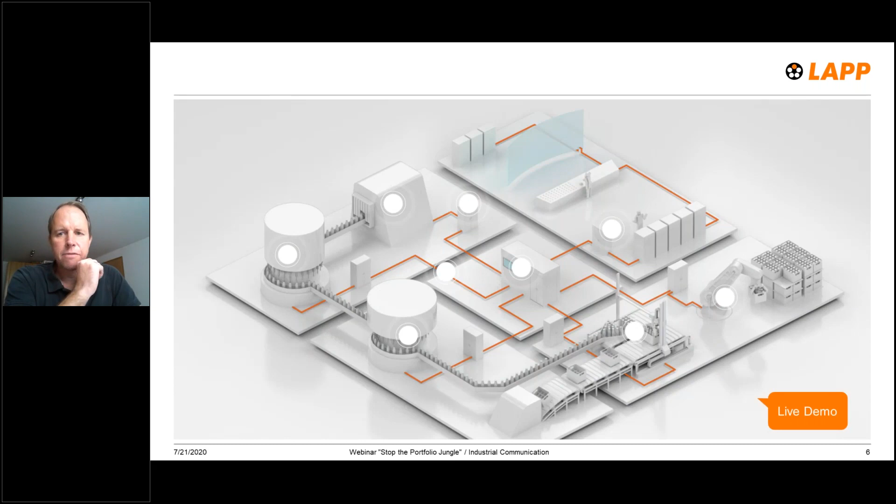So now let's go inside and let's have a look at our website, where you can find all these great tools for helping you in finding the right products for your applications.

So now we are on the LAPP website, lappkabel.com. This is the English version. You can switch over from German to English if you don't know how that works - it's on the right side here.

What you can see on the left side here is the normal entrance if you are looking for a certain component. If you're looking for a certain Ölflex cable, or Unitronic bus cable, or Etherline data communication cable, there you find the hierarchy behind this, beginning from Cat5 to flexible installation and so on. And then at the end, you'll also be guided to a certain part number of your product.

But what I want to show you today is some alternative and new ways that we have created to find that right product, especially now today focused on industrial communication. I will switch off the camera now because I think it's easier for you to see the complete website that way.

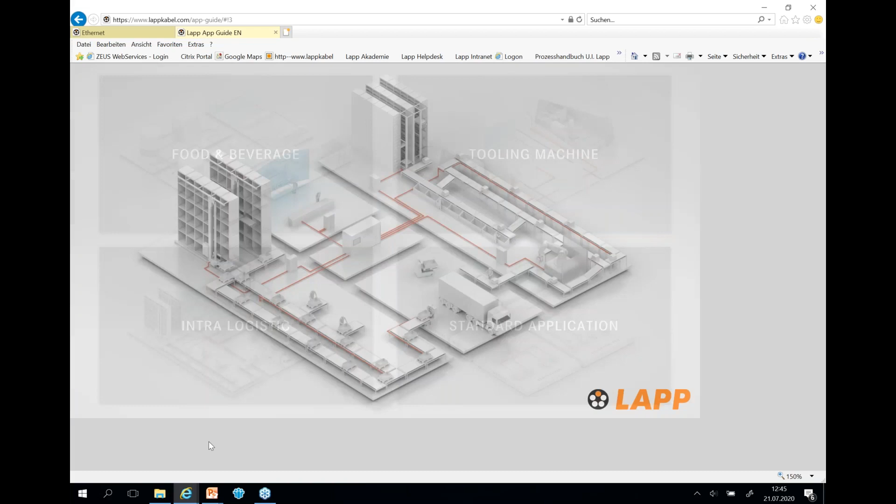But sure, since we are offering a lot of solutions for different industries, at the moment we have 3 industries here. Since we are still working on that tool, it's something that will be further developed, and some further industries will be added there.

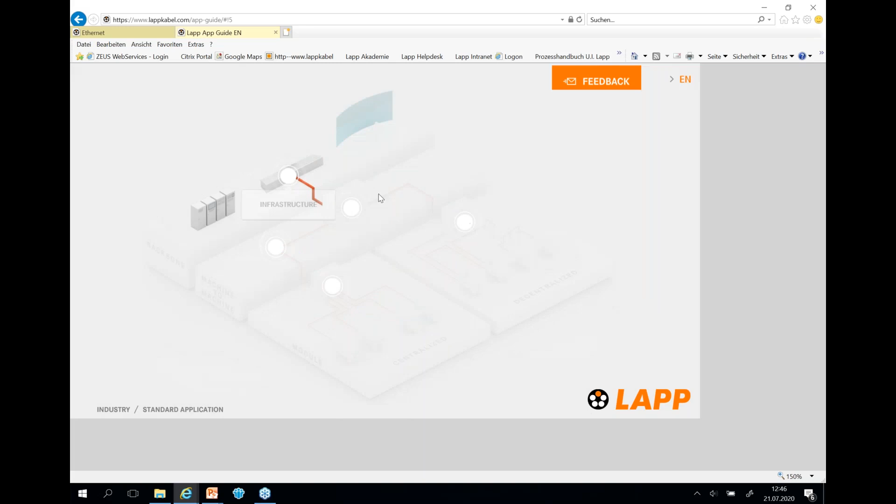So if you are working in a different industry that is not mentioned here, you can also refer to that standard, what we call standard application. If you look at this, it looks a little bit like the automation pyramid, where you have the office environment, the machine-to-machine communication, and certain machines where you have to build up some communication.

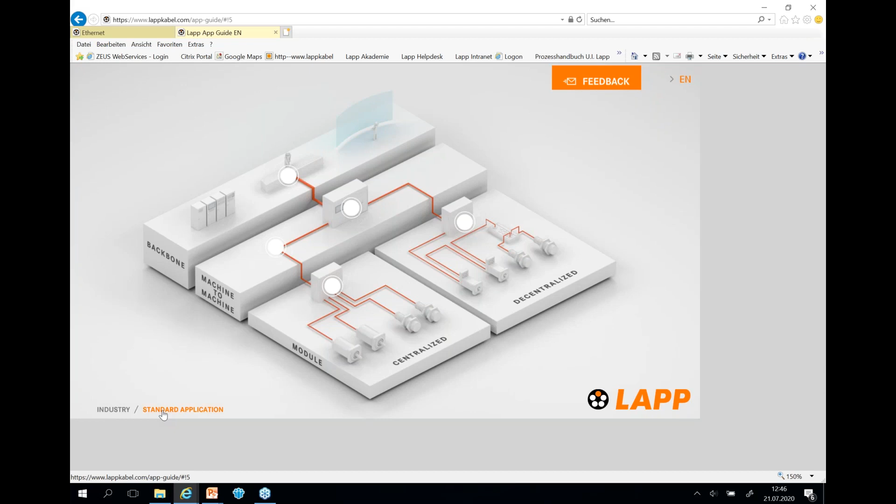So I want to show you some examples in the food and beverage industry. Food and beverage is a very demanding industry, especially for environmental conditions, because you have a lot of food there, you have a lot of cleaning of machines with aggressive cleaning detergents, so for components this is very often high stress, and you need very robust, reliable components that can withstand those conditions.

So first of all, we have to select here the communication system. Now you can find exactly one here. This is Profinet, in Europe the most important system, but we are planning also for the future to enhance this with additional communication systems like Ethernet IP. So we select Profinet.

Now we see this plant here, which is a bottle filling plant. That means we have here a bottle cleaning machine, then a bottle filling machine. Next step is bottle closing machine, and then boxing machine where the bottles are packed in boxes, and then we have a palletizing robot at the end, which takes the boxes and puts them on pallets.

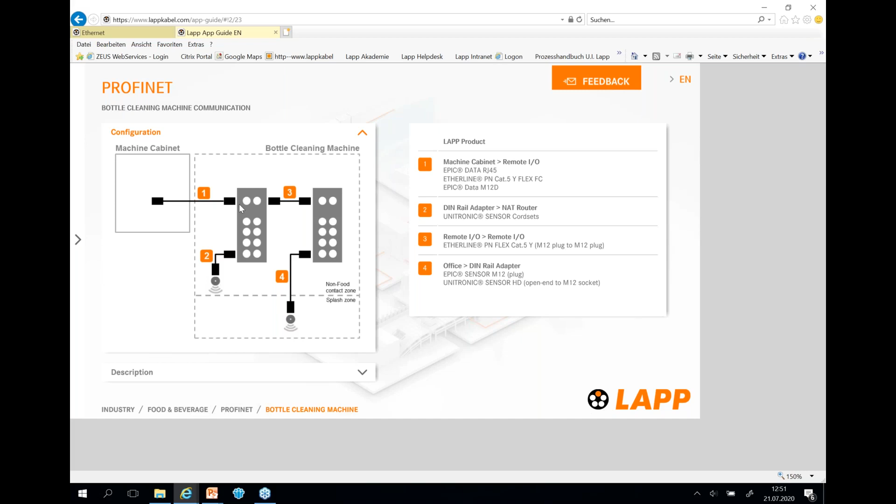So now looking at that cable, EtherLine PN-Cat5 Y-Flex FC is a Profinet cable, category 5, PVC, flexible, and FC stands for Fast Connect. That means it can be stripped with our Fast Connect stripping tool. Inside the cable there is a special inner sheath under the screen. So with this we can use that tool that makes stripping very fast and easy, stripping the outer sheath and the screening of the cable in one step.

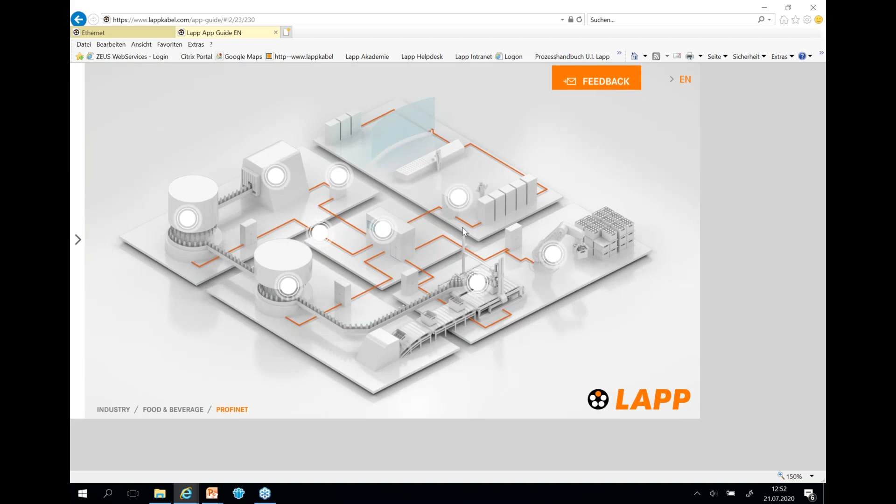So, sorry, I did not use the back button. So now looking at other application, let's have a look at that palletizing robot here.

Robots are not just used in food and beverage production, they are also used in automotive production or in other applications. So the solutions you can see here could also fit similar applications where robots are used.

What is very typical for cabling on the robot is the cable that goes from the foot to the remote I/O, which is placed on the gripper of the robot. On the remote I/O, there's also a sensor connected with a sensor cable. So again, it's an end-to-end solution coming from the machine cabinet, going to the remote I/O, and going to the sensor. What I said was very typical here is that cable for a robot, which is a special torsion cable, because on the robot we have a lot of torsional movement and stress for the cable.

So what we recommend here is our EtherLine torsion Cat7 cable, which is a category 7 cable, very robust for torsion applications. Depending on the device you're using, the remote I/O, or there could be also a camera or something else, you could use a category 5 cable, which could also fit for 100 megabit remote I/O. We have selected here the torsion Cat7.

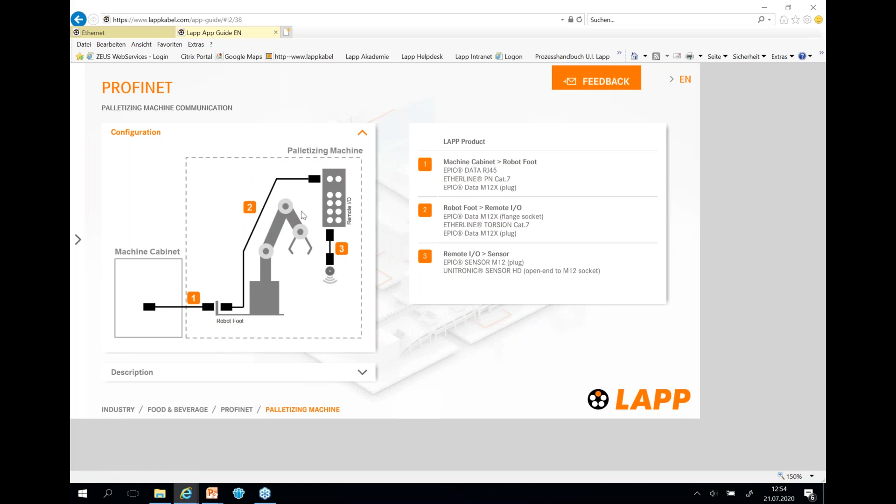So, and since we are using an open end patch cord, we also need a connector that is connected on the end of the cable and goes into the remote I/O here.

What is also designed in here is an interconnection on the robot foot, which makes it possible to easily and fast change that torsion cable, because this torsion cable is stressed by the torsion movement, and so there's also some wear and tear at the cable. Sometimes this cable has to be replaced, and that makes sense to have a connection here.

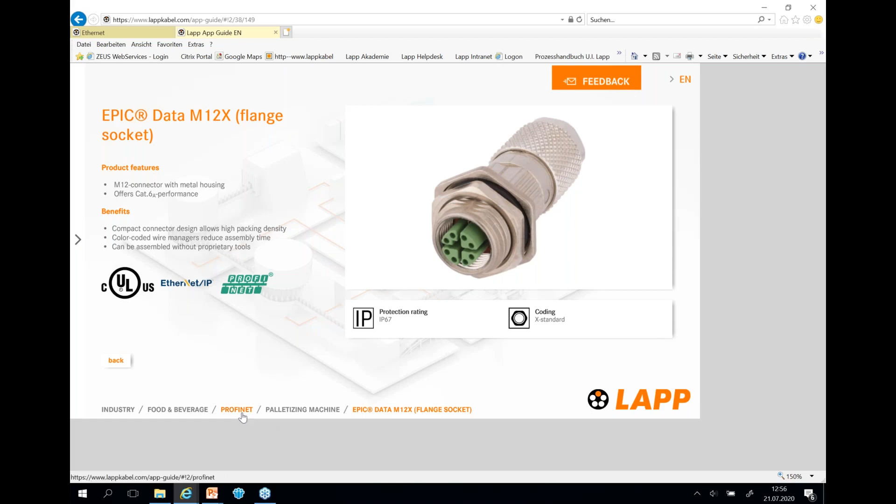So, last but not least, number one, that goes from the robot foot to the machine cabinet, and installation is usually in a cable raceway or on a cable tray. We have decided here to use EtherLine PN Cat7, since here the installation is in a raceway, but sometimes it could also happen that you have a cable tray. In this case, we would recommend using a tray cable.

And going in the cabinet, we have our Epic Data RJ45 connector that is connected to the end of the cable. That's a field installable type where you don't need any special tools to install it. It can be installed very easily and fast.

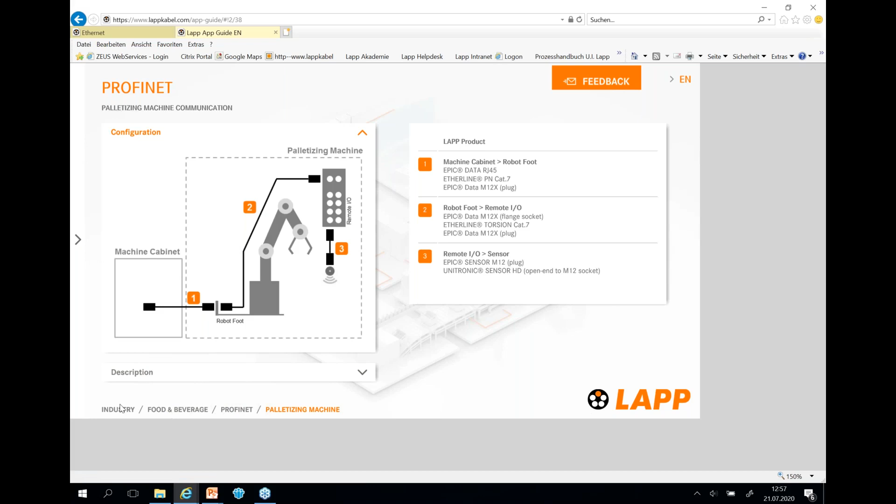So now let's jump back. Just want to jump in here. You know, many machines or plants also have a main cabinet or control cabinet where you can control the whole factory. This is what we also have here. And this control cabinet or main control cabinet makes the connection between the factory, the plant, and the office. So we always have the machine cabinet of the machine connected to the main cabinet, and we also have the office that is connected to that main cabinet.

So what you can see here now, some typical components you can find there: a PLC, maybe an HMI for controlling the process, and then we also have a remote I/O connected here. The patch cords we are using here are our EtherLine PN Flex patch cords, which are Profinet patch cords for these two RJ45 connectors, perfect to do the connection between components like that switch and the remote I/O, or the switch and the NAT router there.

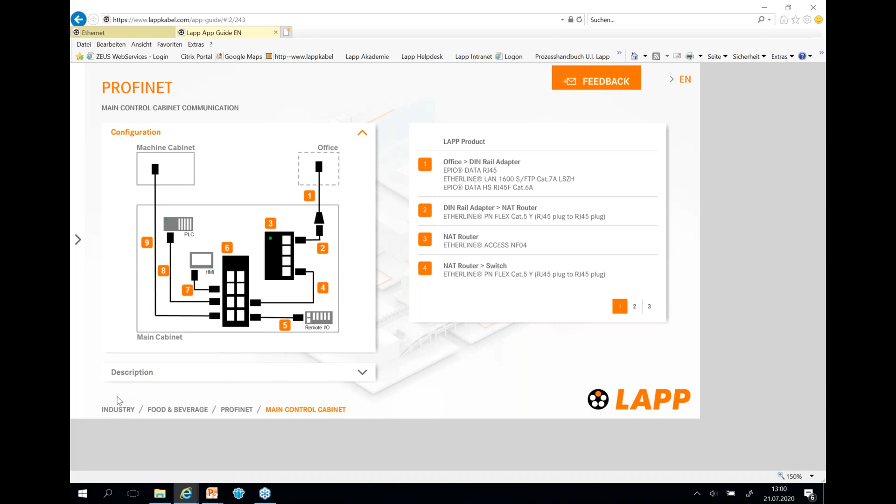Okay, that so far is about our application guide.

Since very often you are maybe supplying different industries, maybe not food and beverage, maybe not automotive production, we have another way created here: product selection by protocol standard.

Sorry, that was the wrong one. I don't want to jump in here. I need this one.

So Ethernet applications can be found here on the left side. There you find many standard applications that you can find in typical industrial machinery.

You often have a main control cabinet, a machine control cabinet, and communication from cabinet to cabinet. That means a typical cable installed on a cable tray for communication between two cabinets, or some call it machine to machine.

Then we have robots, or linear moving applications. This is usually done with drag chain cables. Or we have building, office, or daisy chain topology. If you have a transport line for material transport, you often have a so-called daisy chain topology.

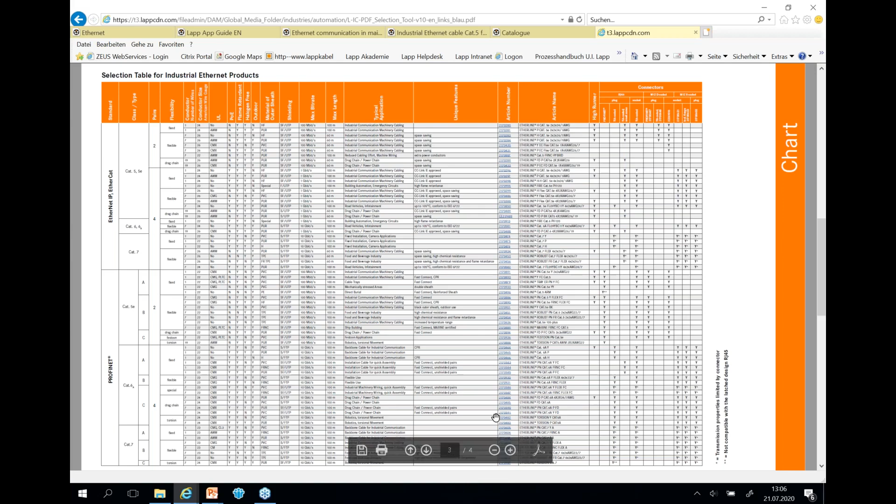Installation class A means it is for fixed installation. Let me make this a little bit bigger so you can see it.

So, you know, Profinet is separated or classified into different installation types. You have A, B, and C.

A stands for fixed installation, B stands for flexible installation, and C stands for moved applications, which means it could be a drag chain, it could be a festoon installation, which is such a cable wagon, and it could also be a torsion application, for example, in a robot.

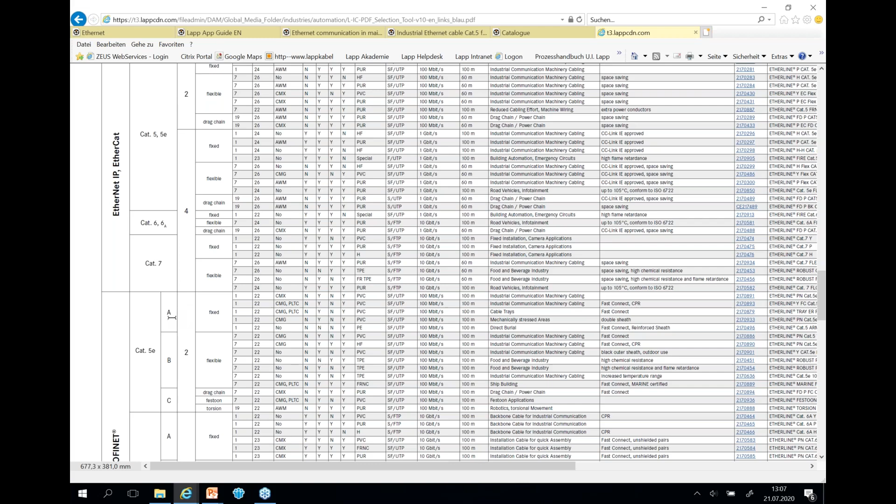So now let's go with that example. We are looking for a Profinet cable with fixed installation, and now we also need a UL approval, which could be CMX, CMG, or PLTC.

And what is the difference? CMX means limited use — you can use it only inside the machinery. CMG and PLTC means it can also be used outside the machine; G stands for general.

It could be used also for connecting two machines. And PLTC is power limited tray cable — tray stands for the cable tray. That means it can be used also on a cable tray, also for connecting two machines together. So now let's go with that simple CMX cable here.

And then we can look at some further features here. Suitable for PoE, it is flame retardant, halogen free, or could be used for outdoor. And then we can see here, can it be used? Is it halogen free? In this case, not. It's simple - where's the material here? It's a PVC cable, and PVC is not halogen free. So it is not halogen free, it is a PVC cable.

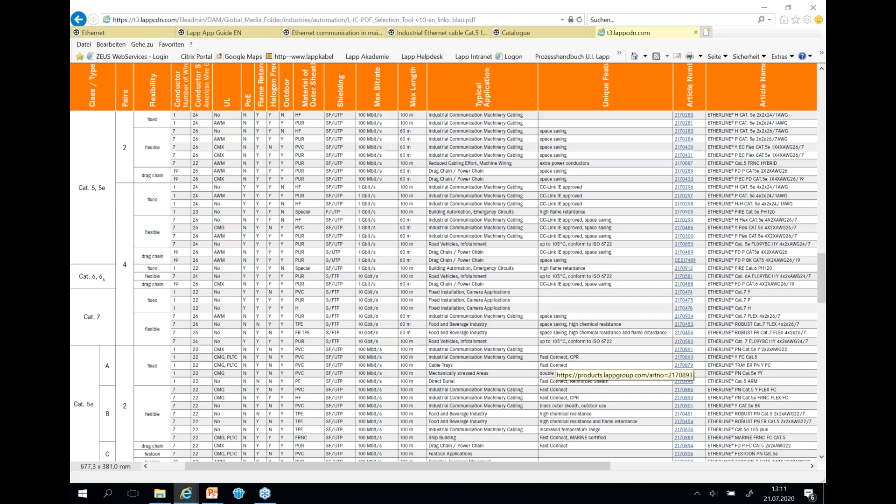So that's it. And once we have selected the cable, then we are maybe wondering which connector we can use for this. So there you can find a selection of connectors: RJ45, M12D coded, M12X coded connector, plug or socket. And then we can go in here, for example, the RJ45 plug type, Profinet, and you can see here where it is suitable. There we can find that yes, here, then you know for this cable we have an RJ45 plug according to Profinet standard.

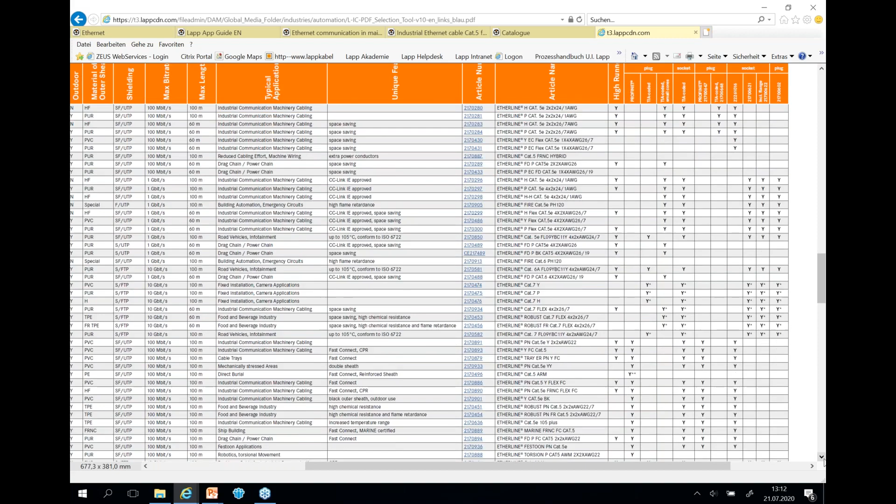So then also the same with the M12D coded or M12X coded could be found here. If you look at the next page here, then we can find also that connector types there. There you have a table with all the connectors that we are offering for industrial Ethernet. So then you can jump in here on the certain part number of that connector. Also, what is important in selecting the suitable connector is the minimal outer diameter of the cable. That means once you know the outer diameter of the cable, then you can select also the right connector. Also the AWG, the cross section of the connector is important, so it should fit to the cross section of your cable.